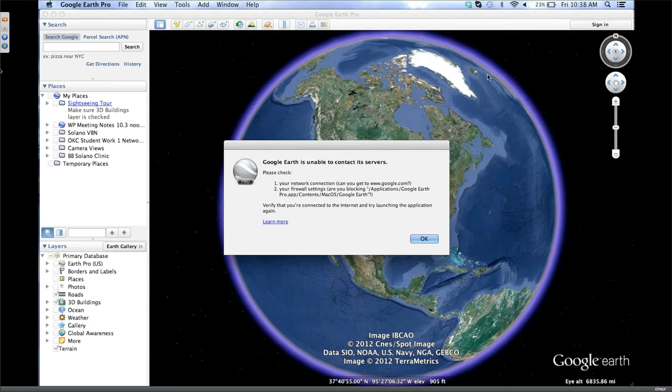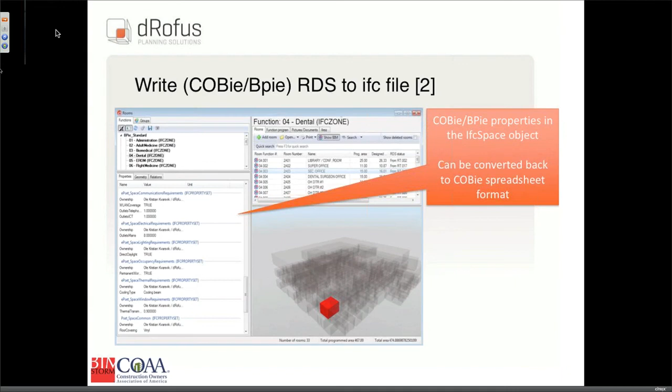So we had groups like dRofus the other day. We had the ONUMA system with programming. We had Beck Technologies—actually since the last day, just last night, we got data back from them for cost estimates for the clinic building that we showed the other day. That was in uniformat with more detail, pulled back into the system.

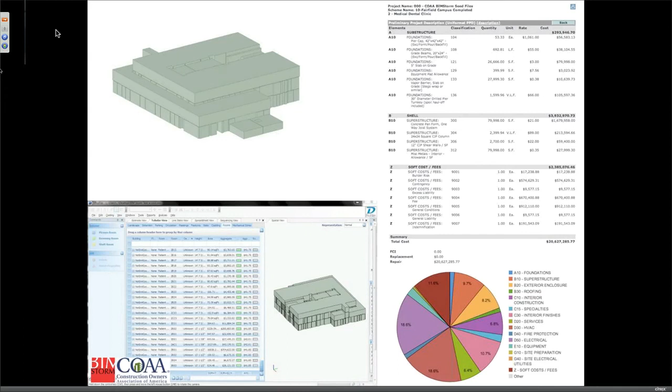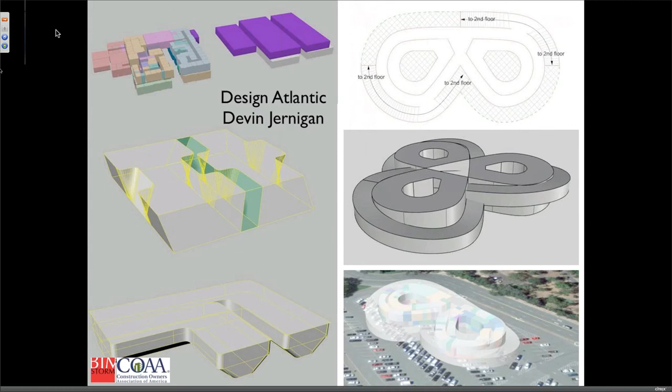So these are two systems talking to each other—the DProfiler system pushing data back into the ONUMA system for the cost estimate for this clinic. We had Design Atlantic, Devin Jernigan, actually going through more detailed analysis and studies of the design of the clinic in multiple tools, multiple building information modeling tools.

We showed some live energy analysis the other day, work orders. The work orders are actually starting to appear more on the plan now, so we responded to some of the work orders to simulate the process, as we had over 40 work orders coming in from the audience since the other day—live work orders that you guys submitted.

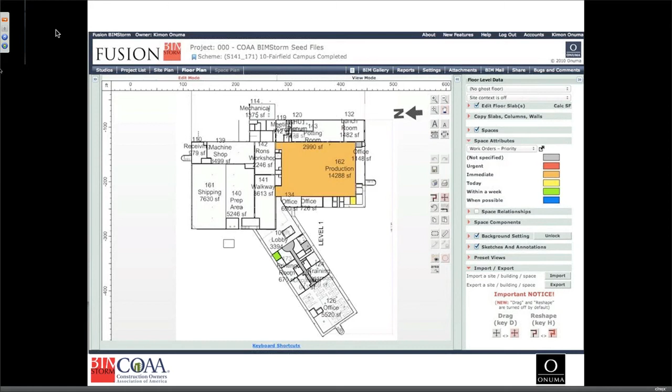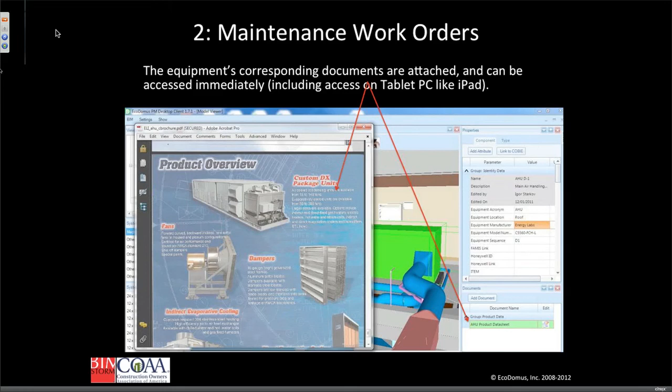We had EcoDomus showing how they can take data from COBie and from other sources, work orders as well, and push it into detailed models and use the EcoDomus system for merging all this data together. This is actually new from the other day.

We had CSW bringing in the utility lines into the Foundation for California Community Colleges, a GIS server. So we're merging sources again—they had GIS data in CAD and in Google Earth, and now it's actually aligned with the buildings that we were planning the other day that we showed in the system.

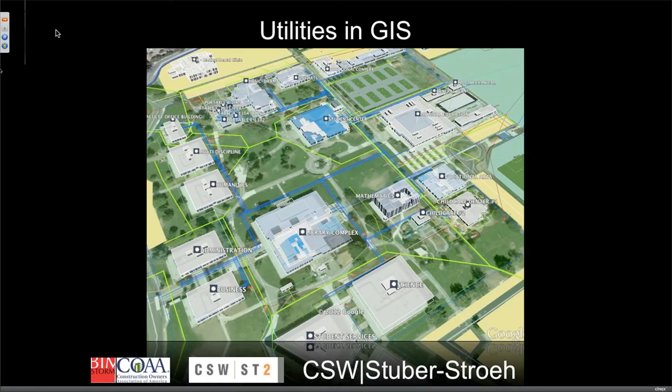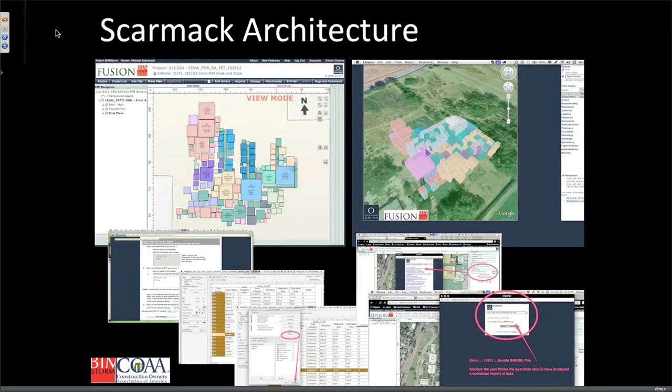We had over $161 million worth of value of projects essentially designed, different versions as well. This is just from the last few days through Balfour Beatty and Scarmack and other teams that were working together. We have these live reports that are coming up—kind of a dashboard view of what's going on as the projects are being designed.

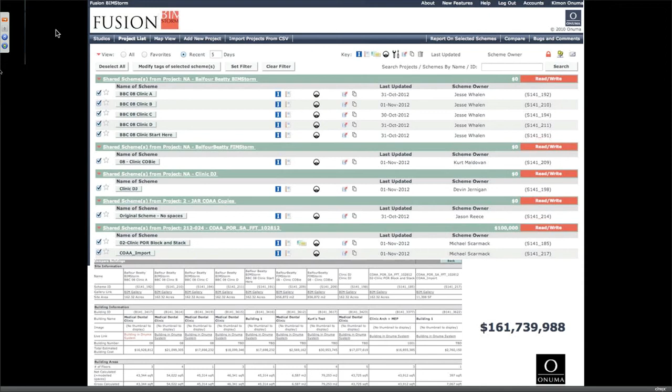We had Mike Bordenaro actually watching online, and he made commentary on the presentation and already posted it to SlideShare, and he's already had 176 views just within the last 16 hours. So it's kind of getting out there—we're broadcasting what's going on here at COAA in Orlando.

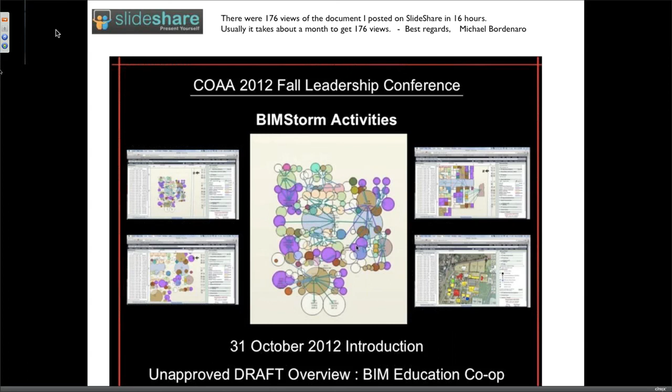We have Broaddus and Associates, who created a dynamic Prezi file. I'm not going to run through the whole thing, but it shows the handover of going from BIM into operations using COBie and structured data. This is a Prezi file that you can actually zoom in and out of to see different parts of the process, and we'll link this live as well from the site.

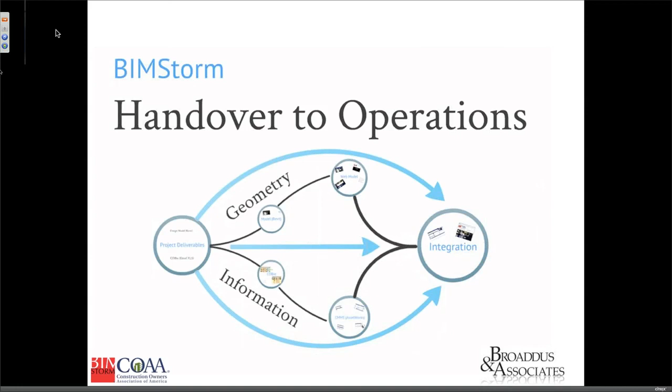We have Balfour Beatty online—that's going to go next. Are you guys ready to show what you did?

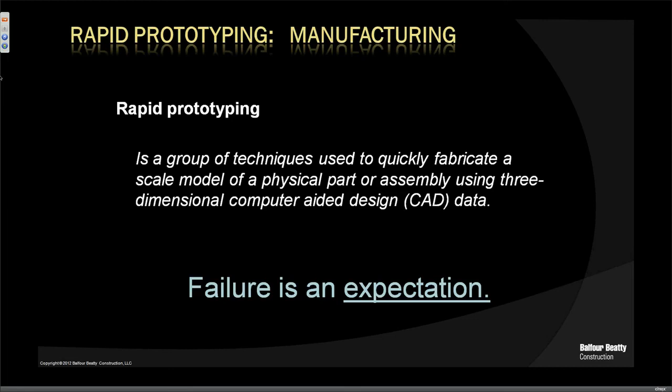The reason why they do that is because failure is an expectation. They're going to get it wrong a lot before they get it right. So that's not unlike what we do with buildings, except we can only build it one time and we have to work on the fly.

So we're very good at doing that, but what we're trying to achieve with rapid prototyping is, during the early process of making decisions for a design, how can we quickly develop many different iterations of the design and use that data from those iterations, the results, to have more data equal better decisions.

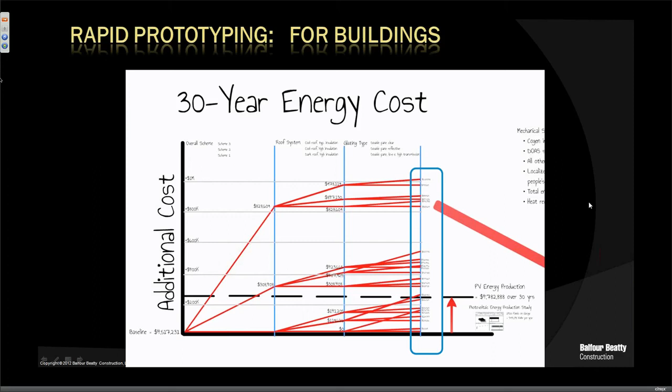So our challenge to ourselves here with this BIMstorm was, can we use the BIMstorm process to enable this rapid prototyping concept? The way we're defining rapid prototyping is that we have a rapid energy analysis and a rapid cost analysis. Combining those two things together is our rapid prototype.

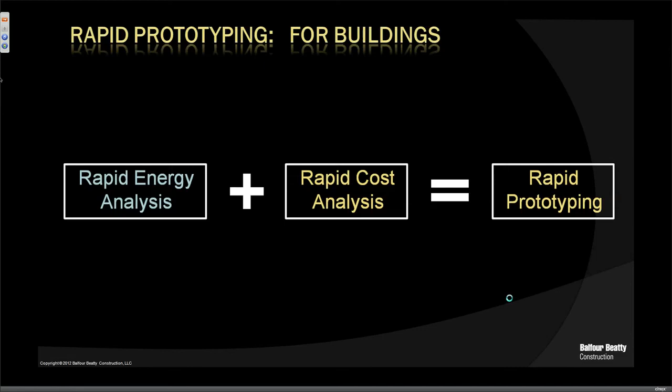So in order to achieve the rapid energy analysis, we used Onuma, Revit, Vasari, and Excel. That's pretty much the workflow from one to the other, through four different applications in order to show you the results. You get a quick shot from Vasari.

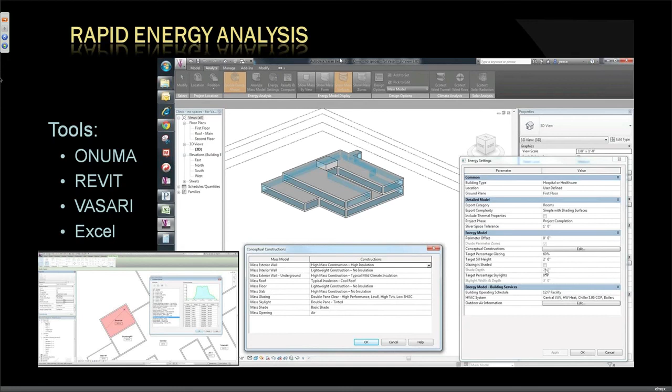These are all the options you have for energy analysis. You can pick high mass construction, low mass construction, high insulation roof, low insulation roof, that type of thing. You have the ability to change the percentage of glass you're looking at, you can put a sunshade on it, and these are some of the things we looked at.

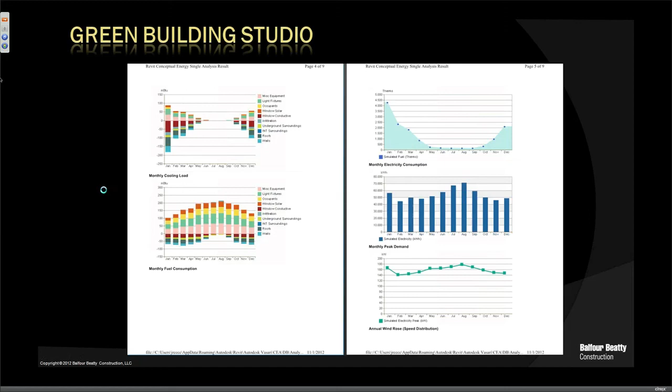And then from that, you get reports that look a little bit like this, but you get some raw data that I pulled through. And then for the rapid cost analysis, we went from ONUMA to Revit to Vasari and then to Excel. Under the description column, highlighted yellow in the middle of the screen, that is our sets that we carried forward that was common between the rapid cost and the rapid energy analysis.

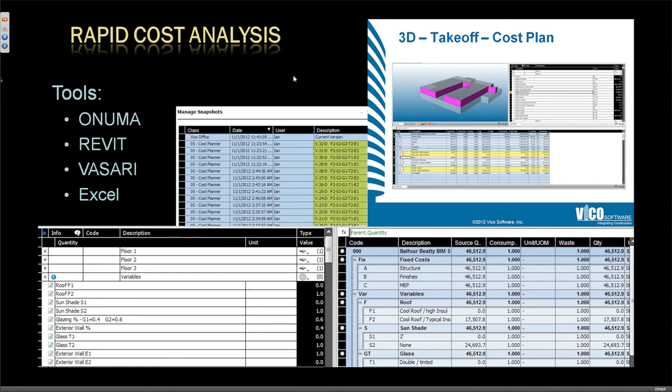So Vico gave us an assist on this one and ran our sets through their software, simultaneously while we were running through the energy analysis. And then we came up with three schemes.

We had the original scheme that was put out in the ONUMA system, that was our baseline. Then we created scheme A and scheme B, and created these variables: two variables for the roof, two for sunshades, glass type, and exterior wall. Altogether, when you exponentially grow that, it equals 32 different sets of possible combinations of all 5 of those things, and that's only looking at 5 different aspects of the building. You have 32 unique ways of looking at the building.

And the data we're getting out of our rapid energy and rapid cost analysis is down here, looking at energy use intensity, life cycle cost of the building, and total first cost.

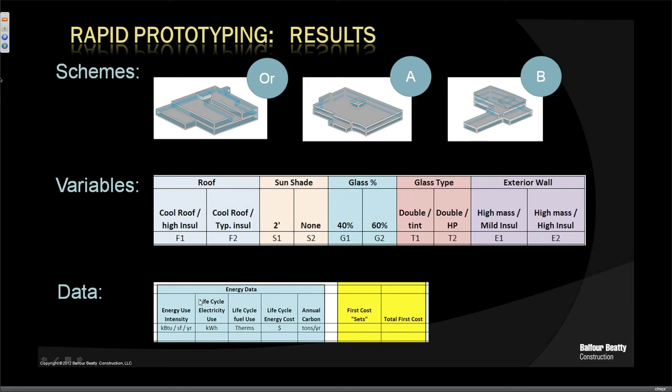So I'm going to dive right in after that intro. I'm diving into the results here, which I really just pasted in and just started to look at.

So this one is taking, actually I think I have a data slide here. There we go, let me orient this. One of our schemes looks like this: this is set 1, set 2, set 3, and this is the combination of those various options we talked about. Here's all the data associated with it. This is a manual transfer of data, unfortunately, from the various software over to an Excel sheet, but this is how we're able to look at the data and create these nice graphs.

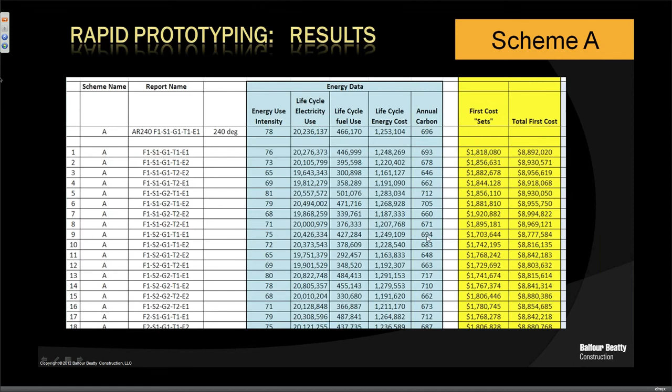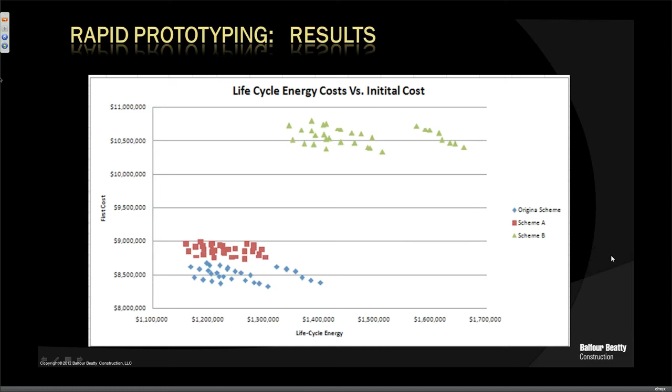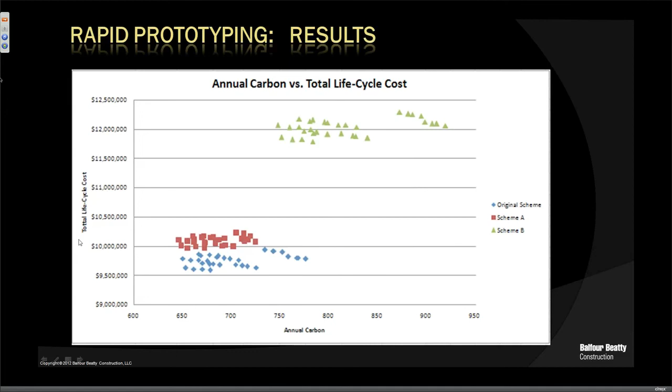Now we can start inspecting annual carbon. We see a similar type of footprint, so there's not initially new data here, but we know we can achieve low carbon at a baseline for a total life cycle cost. So what does this look like for different options?

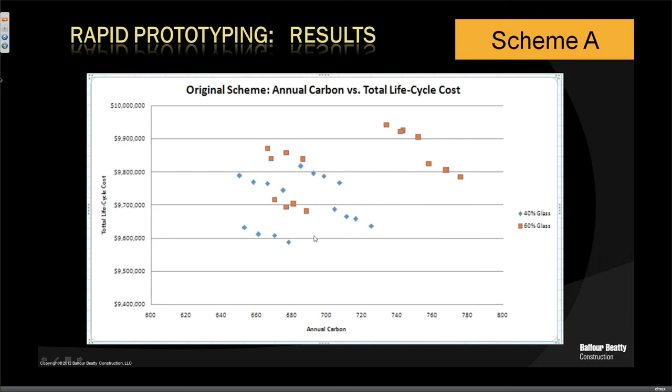If we look at scheme A really quick, what do we see? We see that if I have 40% glass versus 60% glass, those different sets fall under the scale. For the total life cycle cost, if I want 60% glass in my building, the cheapest I can expect is around $9.7 million for scheme A. If I want to save some money, it looks like I can save about $100,000 by going to 40% glass and still achieve a relatively low carbon footprint.

Now we can look at options for one set and see what happens. If we have the baseline, when we make the change to the roof, the life cycle energy cost goes down. The cost goes up in these cases, but you can see the glazing type is actually the cheapest option, while it actually reduces life cycle energy substantially.

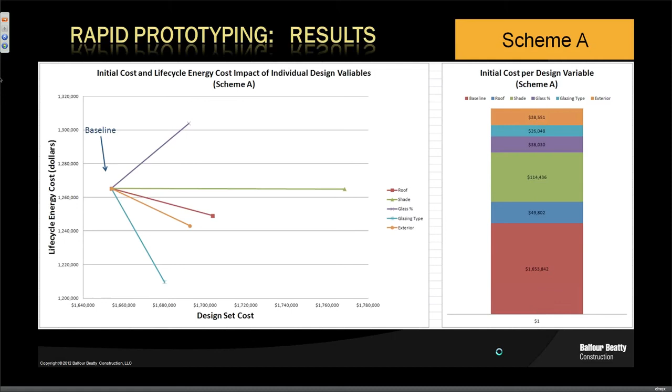So we can very quickly do analysis like this, and you can start getting feedback on what might not actually have a large impact. If we look at high performance glazing versus tinted glazing, there's a clear separation in life cycle energy costs, no real overlap. There's no good set that gives tinted glazing good energy performance, and same thing with annual carbon. So if you really want a high performing building, you have to use the high performance glazing.

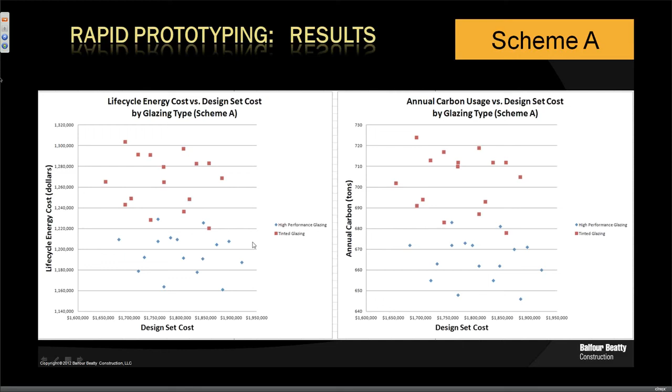Just wanted to wrap up here so I'm not taking too much time. I wanted to outline how long it took to do Scheme A. Scheme A took about 600 minutes, or 10 hours of combined time. Now, of course, we were also doing our day jobs, so this took 3 days to do. But we were able to run that Scheme A analysis in about a day.

And there's an efficiency gain, so it's not 600 minutes per scheme, because once you set up your system, especially in something like Vico, your second iteration is actually half the time, because you're no longer setting up the software to run your analysis. So the second scheme probably takes more in the range of 450 minutes. So to run 3 schemes, we're in the range of 1,500 minutes, or about 25 hours.

And we looked at 96 independent sets of information. Typically when we look at buildings during design, we don't look at anywhere near that amount of information. We're lucky if we can get to a dozen different decision points and options to look at. So now we have a way to gather data and leverage it to make a more informed decision about how we approach the project from a life cycle energy perspective.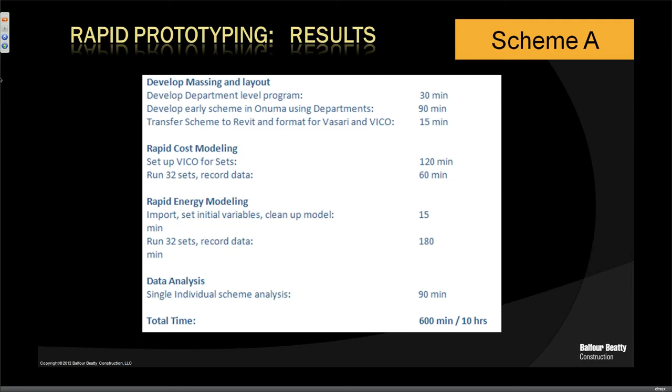And that's all I've got.

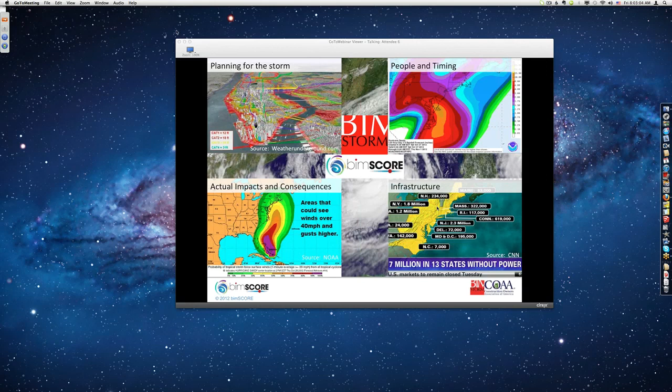And as Calvin mentioned when he did the opening presentation, he compared the BIMstorm with Sandy in 4 areas of planning, adoption, technology, and performance. And while we've certainly seen BIMstorm has demonstrated the swiftness and the power of Sandy, as yet there has been no destructive effect or intent.

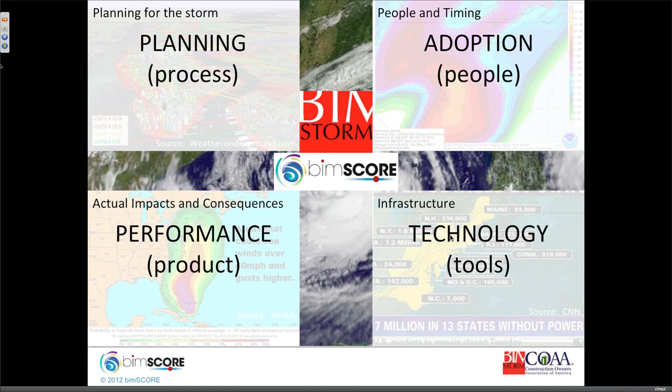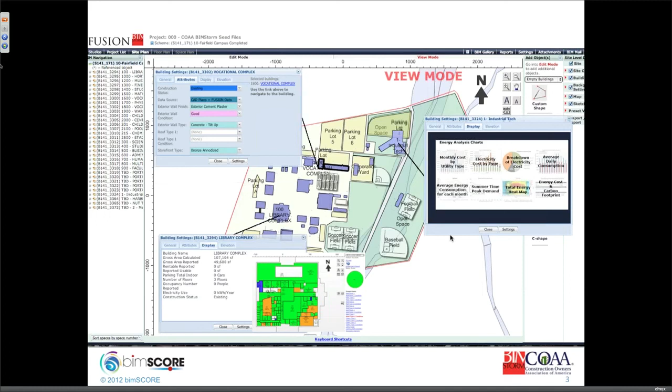We evaluated the process and had an opportunity to compare the results of this active BIMstorm with other processes in our worldwide database, and we've been able to produce an evaluation.

So now we look at a past BIMstorm example. BIMscore has been involved with BIMstorm and Onuma in one way or another since early days. So we took a comparison of a project that is not the most current, and again, we ran through the evaluation.

We found in terms of planning, there was some limited use at the very beginning. In terms of adoption, there were 3 processes which experienced benefit from the technology, only used during 1 phase, 14 model uses, and some of them actually used integrated analysis - that is, comparing more than 1 discipline at a time in order to arrive at an optimized result. As far as performance, the team noted performance in 5 areas relating mainly to communication and project quality, and they were satisfied.

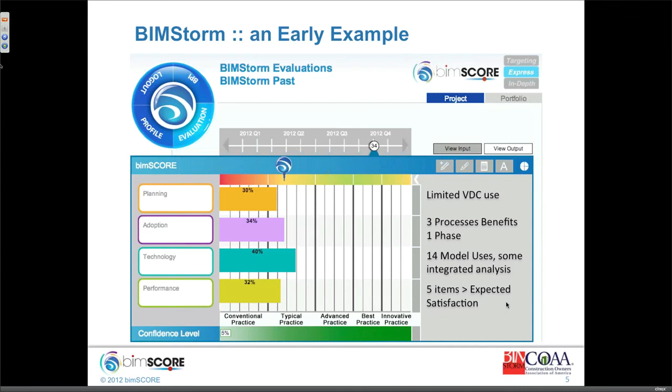Now we step forward to the COAA of today, and we find that there are many more advanced uses of the VDC technology going on in terms of communication, in terms of exchanging models, in terms of saving time, improving quality, and being able to look at more examples, more solutions simultaneously so that the best solution can be adopted. 4 processes are benefiting, still only looking at 1 phase of the project, and again, 14 model uses.

In this case, there were 9 specific items that were mentioned by members of the project team. I won't enumerate them all for you, but I can tell you that some of the new ones were the ability to communicate very rapidly and share model data in order to do some concurrent analysis.

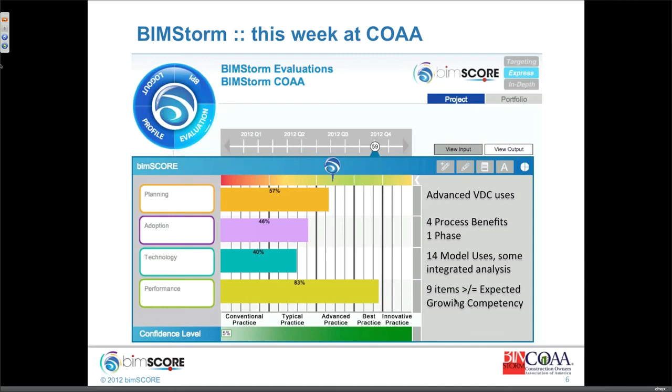The 4th example that we looked at was an example from EcoBuild last year. And the reason we looked at this project is, first of all, although the other 3 projects were academic in nature, this was a medical office building and therefore had different constraints. We also noticed that that BIMstorm ran for a longer period of time and therefore engaged more phases. There were more model uses, including automated optimization made possible by the rapid exchange of data.

And we found that of the 8 items - actually, this isn't the right word here - the 8 items exceeded expectation, and the team reported a growing sense of competency.

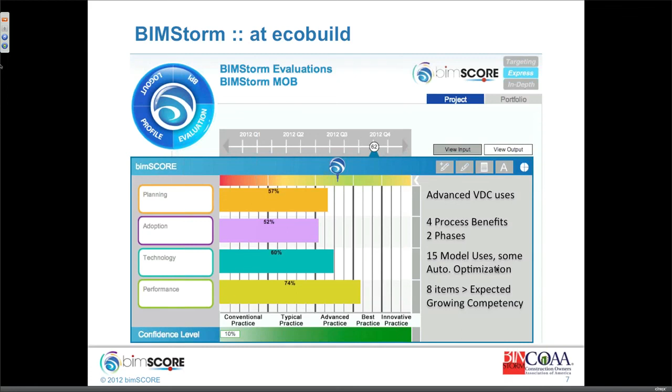So the goal of BIMscore, of course, is to evaluate and benchmark, but the reason we do that is to provide advice. So we thought it would be fun to run through the BIMstorm results and provide a little bit of advice for the team and for Kimon to enjoy.

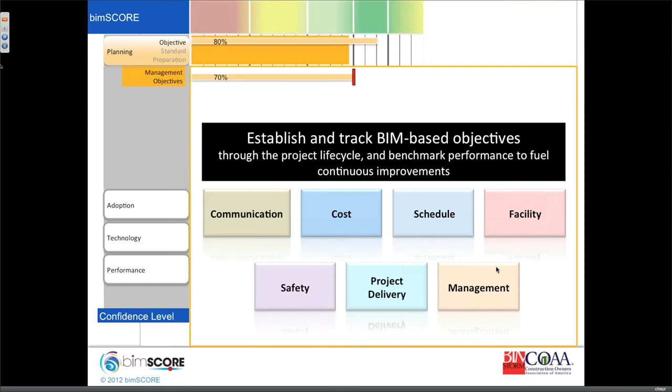The point is to keep everyone focused on the goal and to make sure that we're creating a documented record so that we can later articulate the wonderful things that are actually going on.

In terms of adoption, we'd like to see BIMstorm extended to more project phases, and given all the data that's available, we'd like to leverage BIMstorm into more processes. For example, tightening the synchronization between design and fabrication, and also continuing past design development.

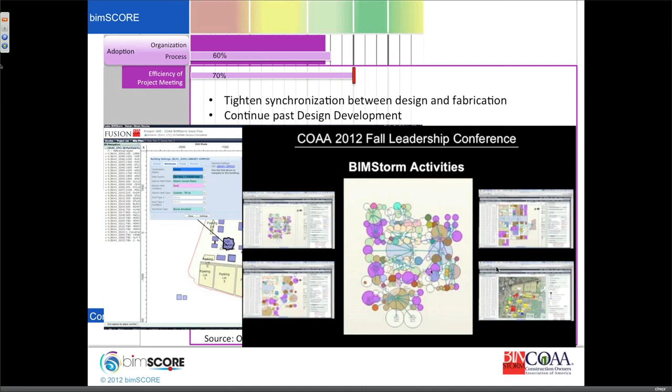In the technology area, there is so much data available and so many players can communicate so quickly. Our advice is to increase the number of model uses, to leverage more building and site elements, and to leverage design automation tools. Here is a snapshot from the BIM score evaluation.

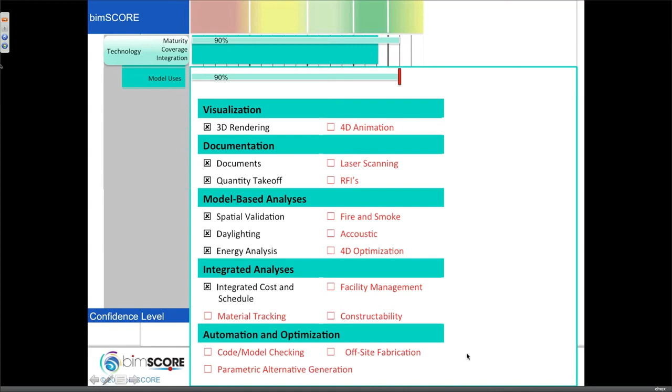In red, you see the areas which were not touched on, especially during this COAA, which is where this snapshot is from. And you can see that there are many more forms of model use and evaluation that could have been employed.

And finally, because the results are stellar, we believe that more frequent, accurate performance tracking, so that the team can articulate the value and benefit being achieved through BIMstorm, would be quite useful.

Here's an example of key performance indicators that we've used on other projects, such as the Walt Disney Imagineering projects that you heard Mark Cole speak of earlier in the week.

So we like to say that BIM is an excellent tool, and that bimSCORE can help provide the roadmap so that you understand what's available and where you are in relationship to possible goals, and then the GPS to give you an easy pathway and make sure to route you around any obstacles, getting you going in the right direction.

We're posting all of these evaluations and more at bimscore.com and invite you to come by and have a look.

So thank you all, and thanks especially Kimon. Thanks, Tony. That was great.

And as you all know, this was a very short period here. Initially, it was supposed to be a presentation. We started expanding it out to this real interaction. So it's great to see, to push the limits and see how far we can get. Obviously, on a real project, it would be much different than this, but that's great information to have going forward.

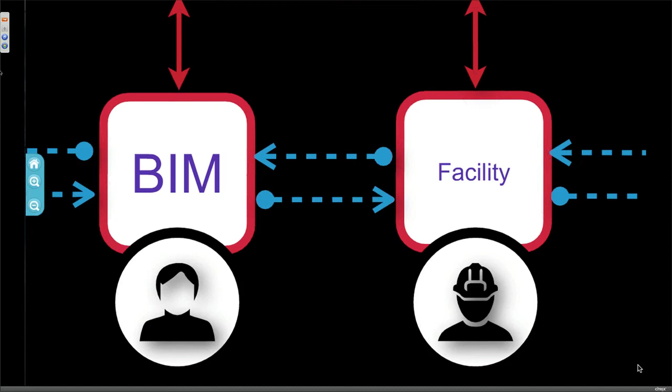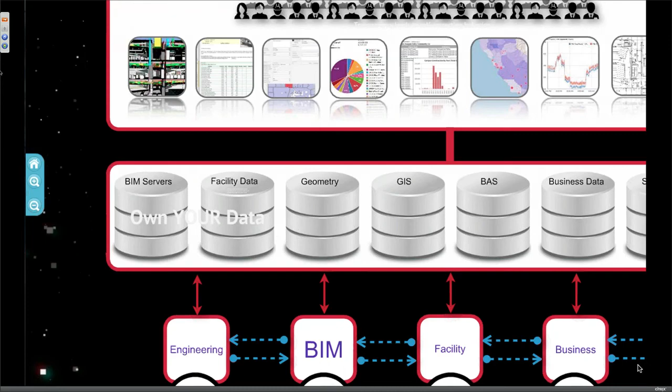So it's that kind of world now, you can't just expect that to happen automatically. The applications that pass information - we saw some examples in the BIM storm of importing and exporting from one tool to the next - it's really a file exchange, import-export activity that's great to have, but you have to see the bigger picture. You really want that big view of getting to your data in a way you can see it, to get people to touch that information. Otherwise you really are losing that value.

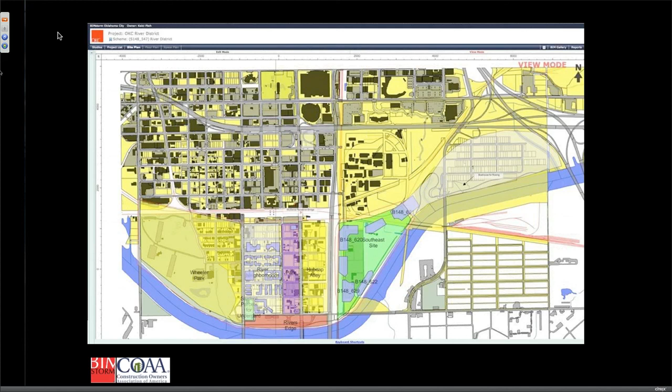Okay, one wrap-up thing here at the end: we are still going on. BIM Storm Oklahoma City is still going on, we invite you, it's next week actually. You can log into the BIM Storm site, you get access for free to the tools, to the review that's going on. You can even submit projects there.

Balfour Beatty actually took the clinic project and landed in Oklahoma City this morning. So they took that same clinic and said, what if we have to reconfigure and do this here, what would it look like? So there's that kind of exercise already happening at Oklahoma City.

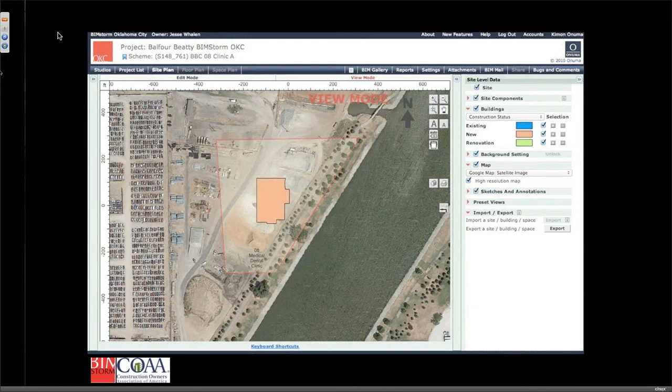And in order to drive a revolution, we need this kind of ability to get to data and move quickly. One key point here is we obviously shrunk this into a few days - imagine if you had a few weeks or a month. Imagine what you can do with a team like this, with this kind of connectivity, with access to specialists like we had with Balfour Beatty. What can happen to a project in that period? It's actually mind-blowing, because we actually run through these type of exercises on real projects.

It's not science fiction, we just showed you a glimpse here. Everything was live, so we'll be posting on the bimstorm.com COAA site. We'll be sending a link to the COAA that you can post on your site to see more of the results, and we'll continue to refine this, because we're using this data to do the work with the National Institute of Building Sciences on this healthcare initiative with VA and DoD. That clinic actually has VA data in it, so we're using it as a test bed of where this can go. You don't have to write this link down, we'll send it to you later, but it has more information there. So BIMStorm COAA and the BIMStorm Oklahoma City is bimstorm.okc.

And we really want to thank the dream team, as we call them, for jumping into this rapid, iterative environment to quickly come up with these different solutions and find potential problems and expand beyond that, as Tony nicely outlined earlier. So thank you very much, and we look forward to hearing more from you as we go forward.